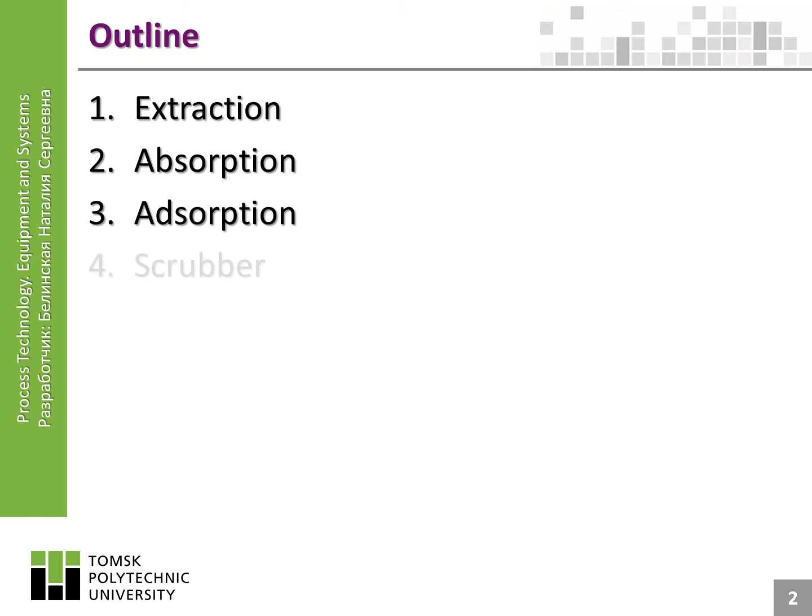In this lecture you will learn about extraction, absorption, adsorption, scrubbers, and solvent dewaxing.

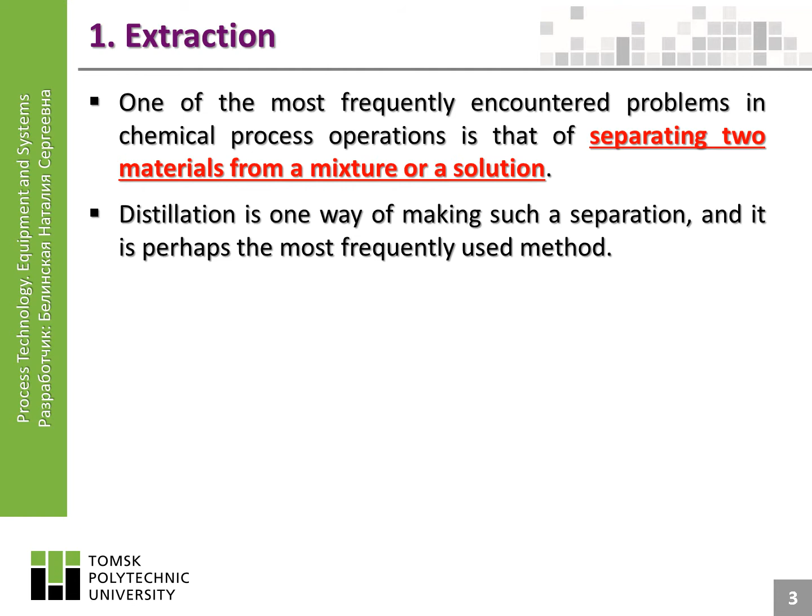Extraction: one of the most frequently encountered problems in chemical process operations is separating two materials from a mixture or a solution. Distillation is one way of making such a separation, and perhaps the most frequently used method. Another useful method is extraction. Extraction is a process for separating two materials in a mixture by introducing a third material that will dissolve one of the first two materials but not the other.

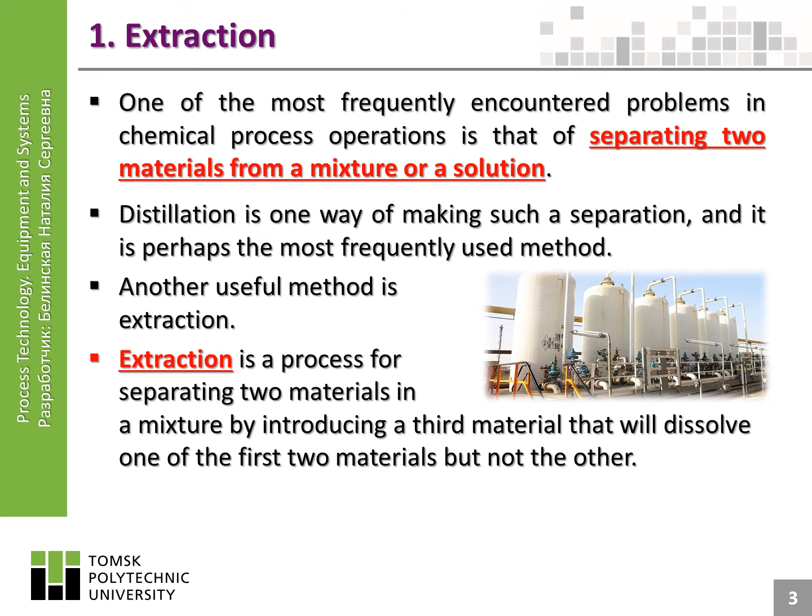Each method of separation has its own advantages and disadvantages, and several situations call for the use of liquid-liquid extraction rather than distillation or other methods.

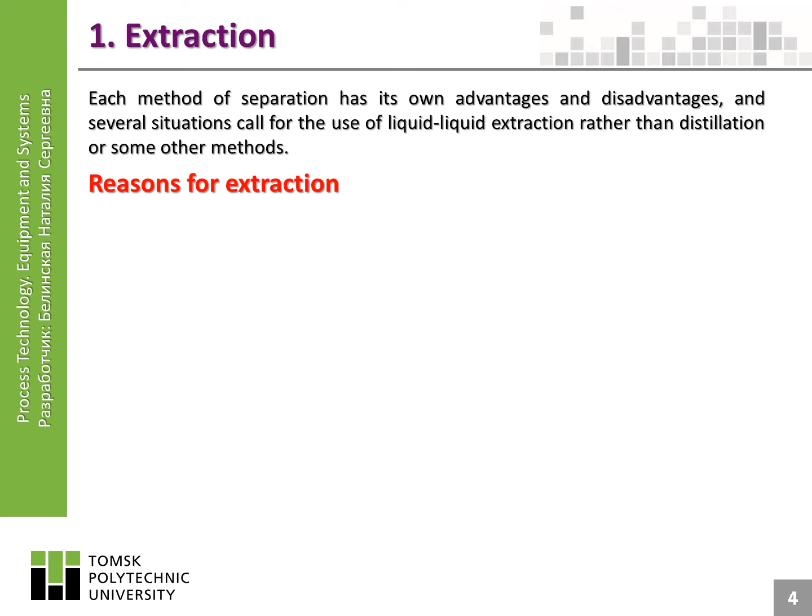Reasons for extraction: in many cases, it is impractical to separate two chemicals by distillation because the boiling points of the materials are too close together. In such a case, it is frequently possible to find a third chemical that will dissolve one of the two chemicals. In this situation, extraction would be a better method than distillation.

Many chemicals are highly sensitive to heat and will degrade or decompose if raised to a temperature high enough for distillation. In this case, extraction, which can usually be carried out at normal temperatures, would be a practical alternative.

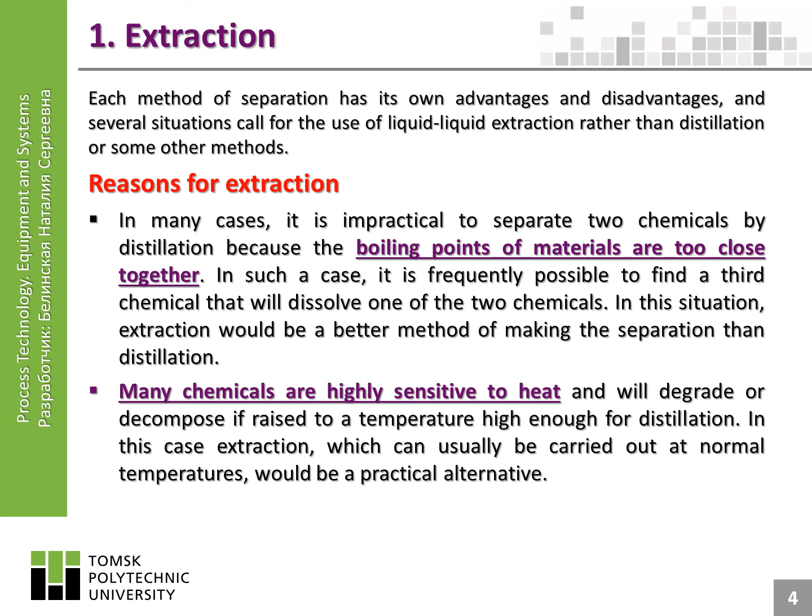Often, one of the materials to be separated is present in very small amounts. It might be possible to recover such a material by distillation, but it is usually much easier and more economical to do so by extraction.

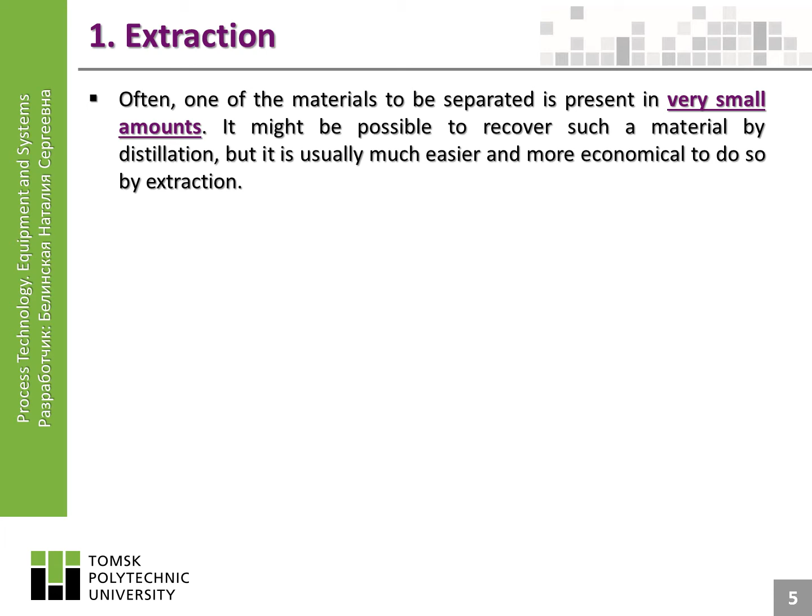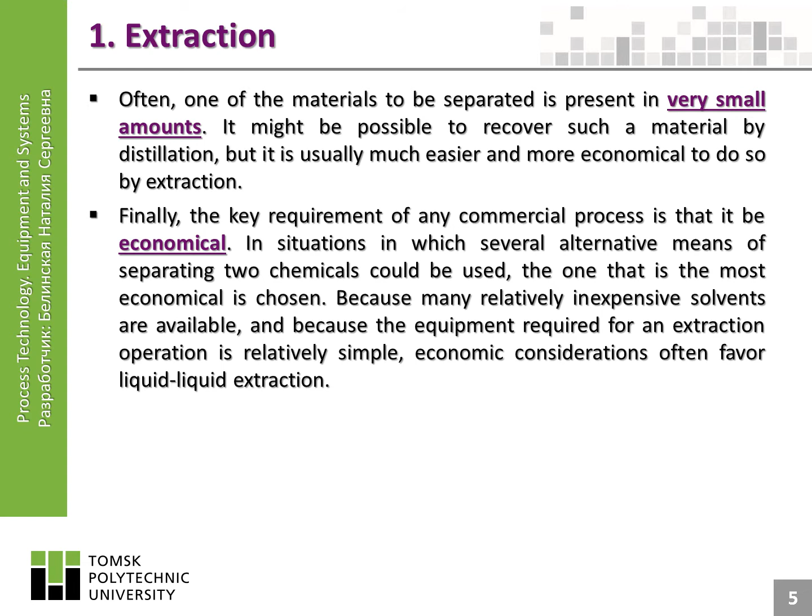Finally, the key requirement of any commercial process is that it be economical. In situations where several alternative means of separating two chemicals could be used, the most economical one is chosen. Because many relatively inexpensive solvents are available, and because the equipment required for an extraction operation is relatively simple, economic considerations often favor liquid-liquid extraction.

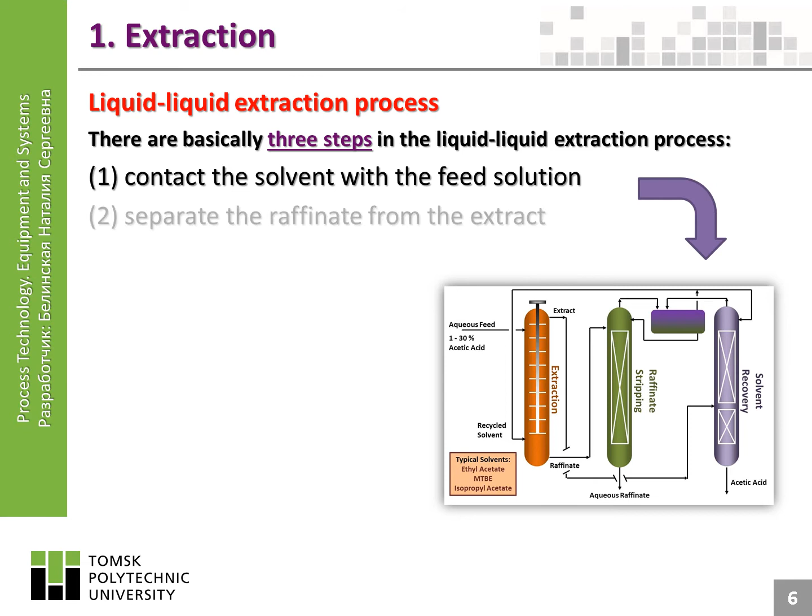Liquid-liquid extraction process: there are basically three steps. First, contact the solvent with the feed solution. Second, separate the raffinate from the extract. Third, separate the solvent and the solute. This final step, recovery of the solvent and solute, is left to be done by other processes such as distillation.

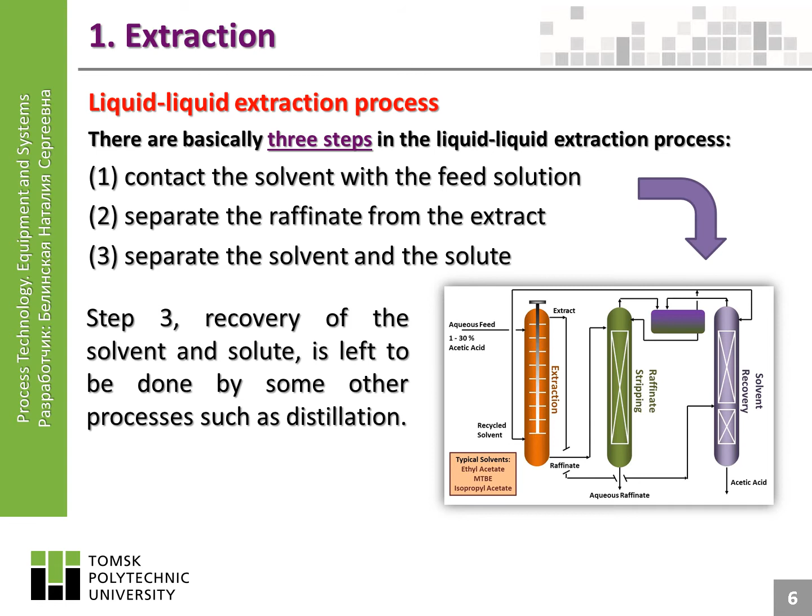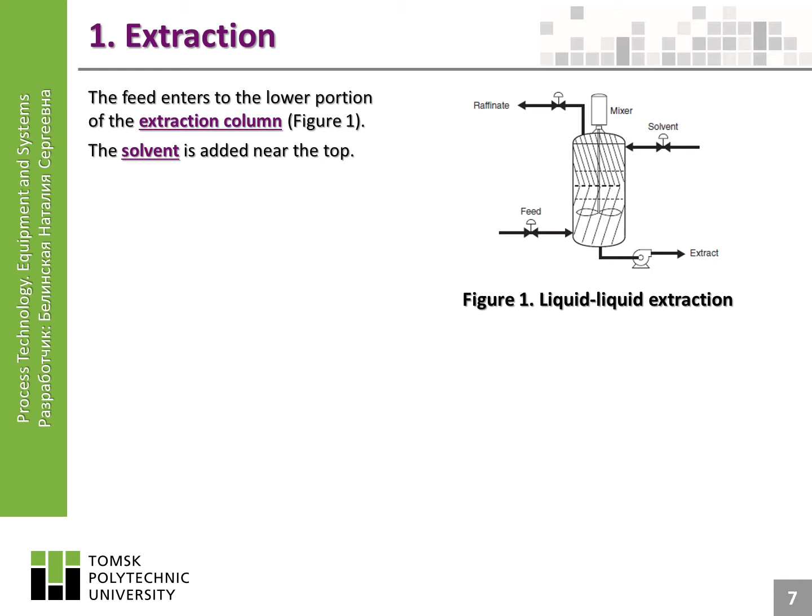The feed enters the lower portion of the extraction column, and the solvent is added near the top. Because of density differences, the lighter feed solution tends to rise while the heavier solvent sinks to the bottom. As the two streams mix, the solvent dissolves the solute. Thus, the solute, which was originally rising with the feed solution, reverses its direction of flow and goes out with the solvent through the bottom of the column.

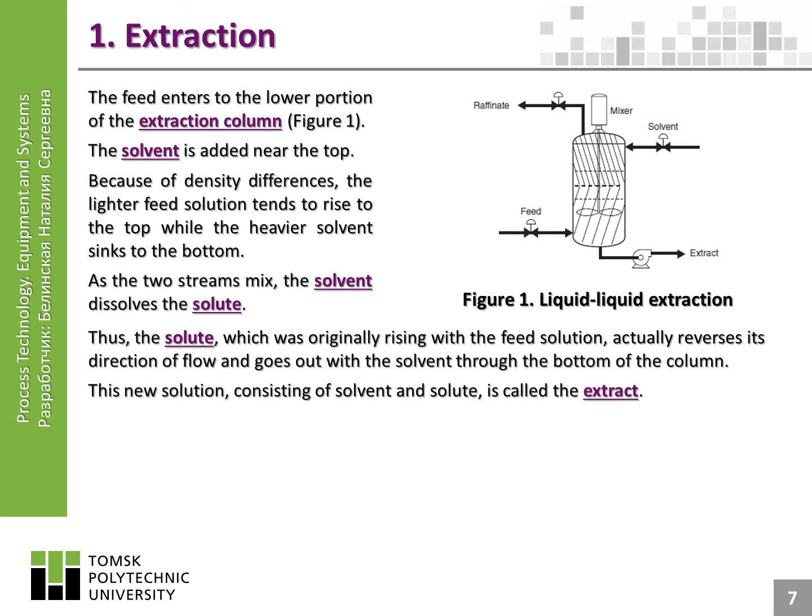This new solution, consisting of solvent and solute, is called the extract. The other chemical in the feed stream, now free of solute, goes out the top as the raffinate. The raffinate and extract streams are not soluble in each other and will layer out.

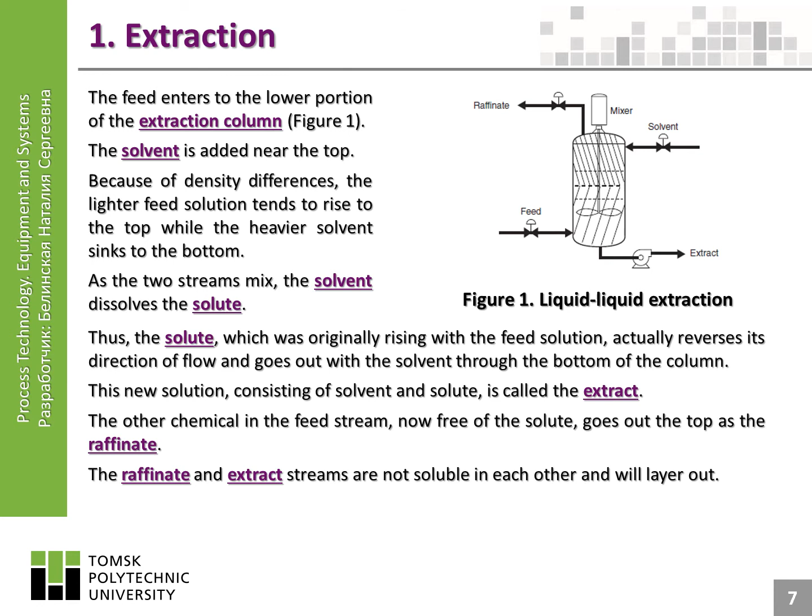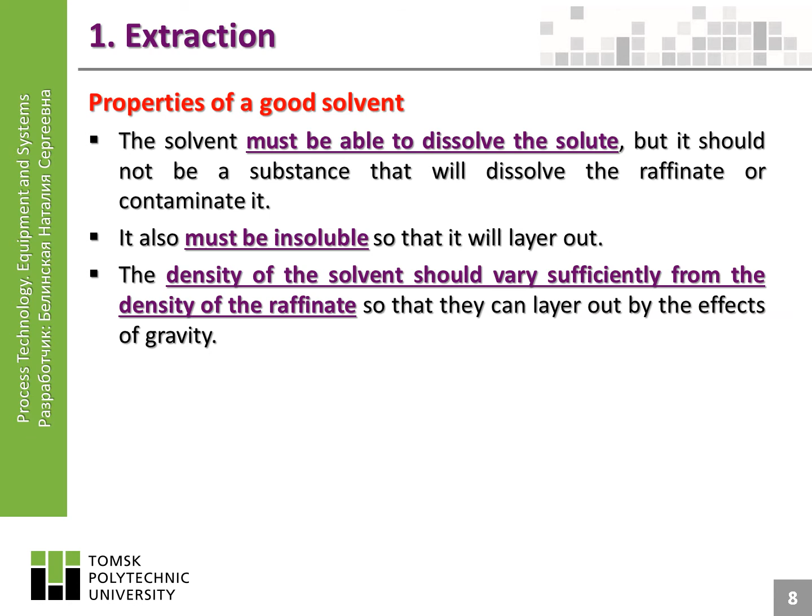Properties of a good solvent: the solvent must be able to dissolve the solute, but it should not dissolve the raffinate or contaminate it. It also must be insoluble so that it will layer out. The density of the solvent should vary sufficiently from the density of the raffinate so that they can layer out by the effects of gravity.

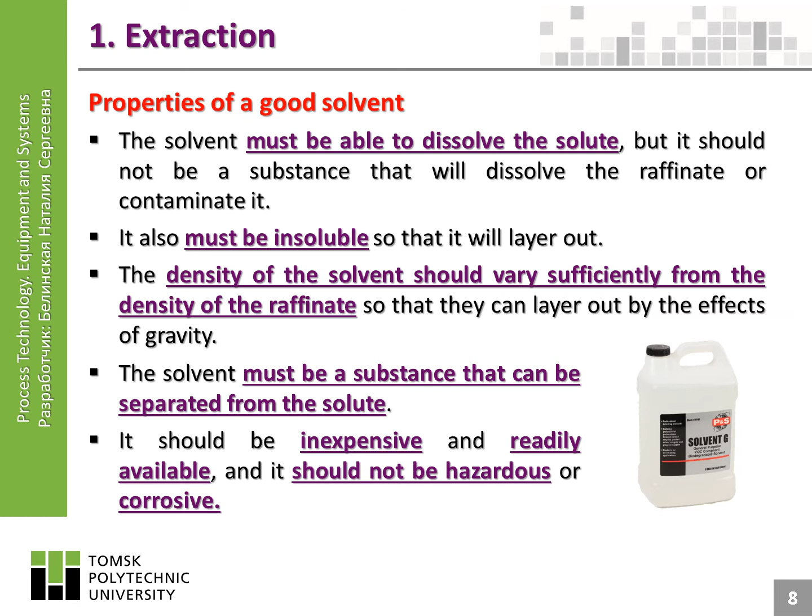The solvent must be a substance that can be separated from the solute. It should be inexpensive and readily available, and it should not be hazardous or corrosive.

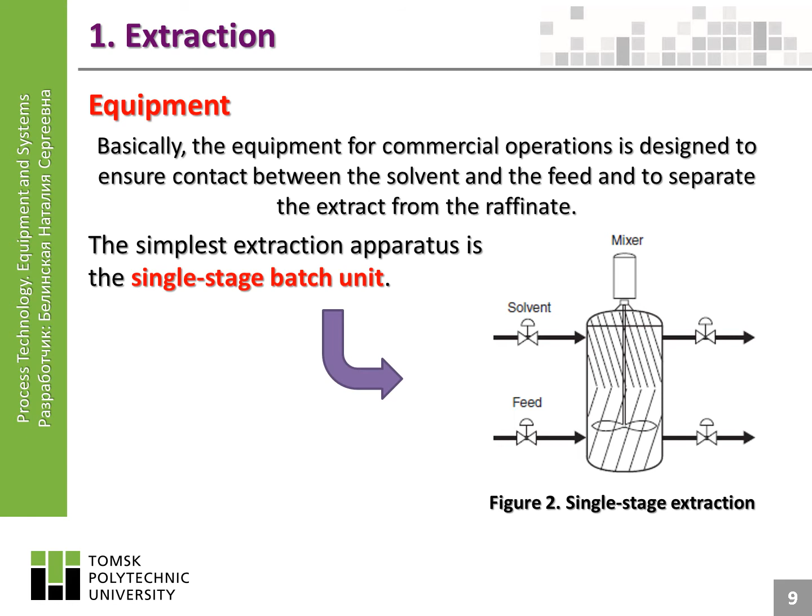Equipment: basically, the equipment for commercial operations is designed to ensure contact between the solvent and the feed and to separate the extract from the raffinate. The simplest extraction apparatus is the single-stage batch unit. Multi-stage operation consists of a series of single-stage units coupled close together. Figure 3 illustrates concurrent extraction, and Figure 4 illustrates countercurrent extraction.

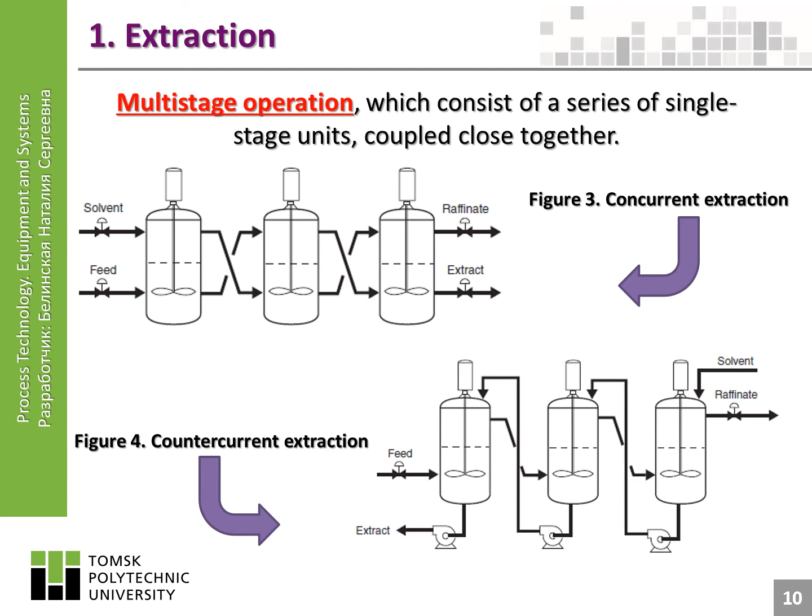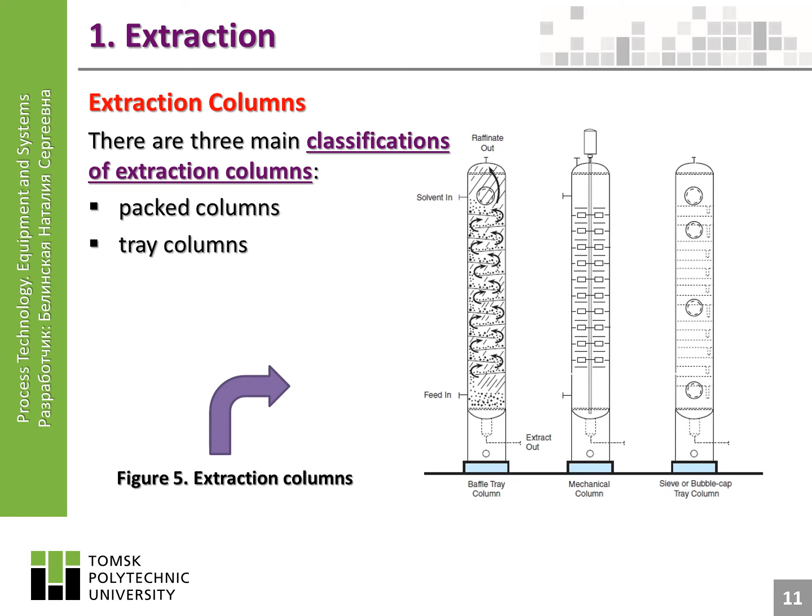Extraction columns: there are three main classifications of extraction columns: packed columns, tray columns, and mechanical columns.

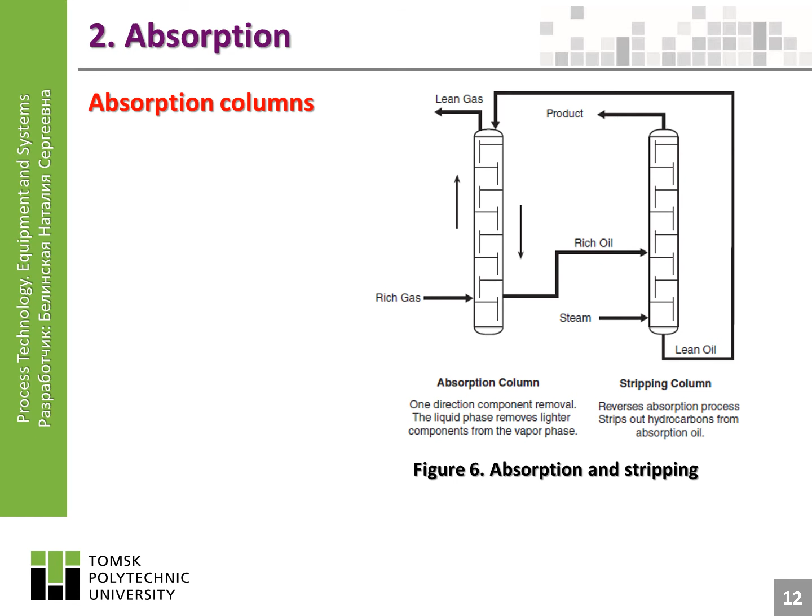Absorption. Absorption columns: an absorption column is a device used to remove selected components from a gas stream by contacting it with a gas or liquid. Figure 6 illustrates the scientific principles involved in absorption.

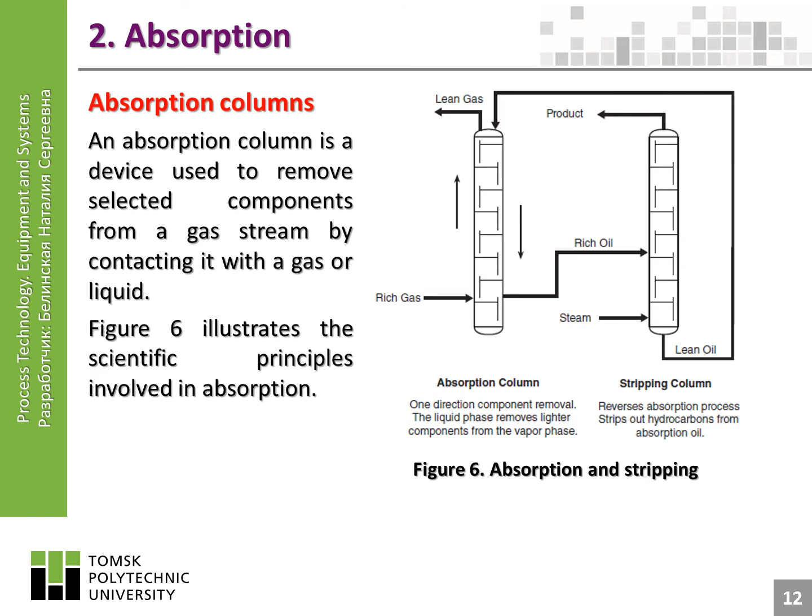Adsorption is the process in which an impurity is removed from a process stream by making it adhere to the surfaces of a solid. During the adsorption process, the mixture to be separated is passed over the fixed bed medium, the adsorbent, in the primary device.

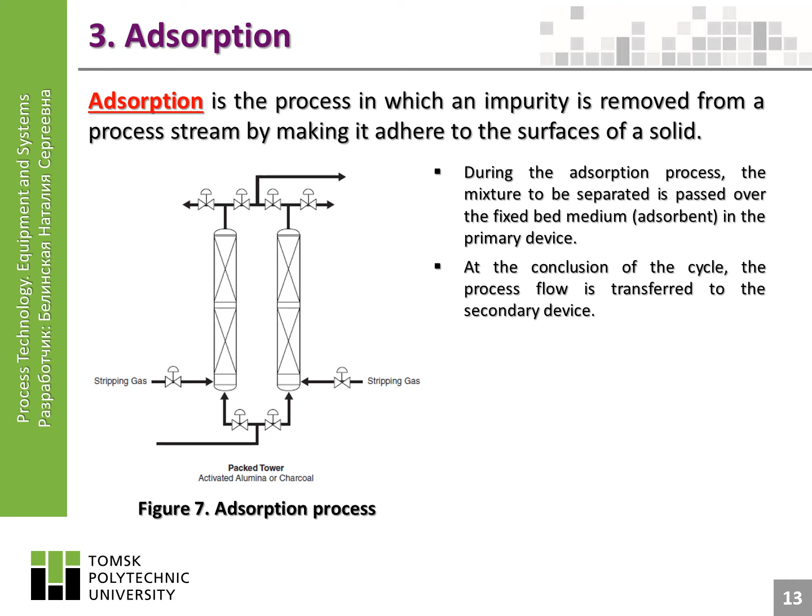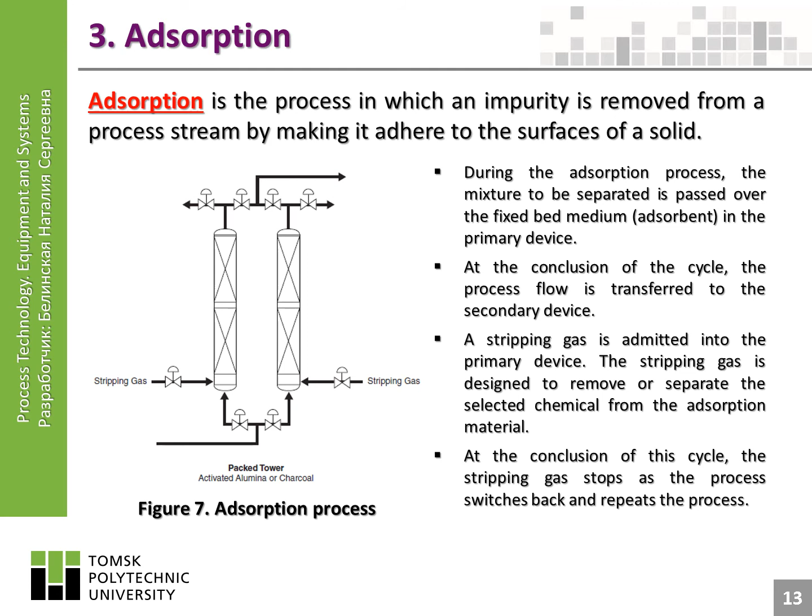At the conclusion of the cycle, the process flow is transferred to the secondary device. A stripping gas is admitted into the primary device, designed to remove or separate the selected chemical from the adsorption material. At the conclusion of this cycle, the stripping gas stops as the process switches back and repeats.

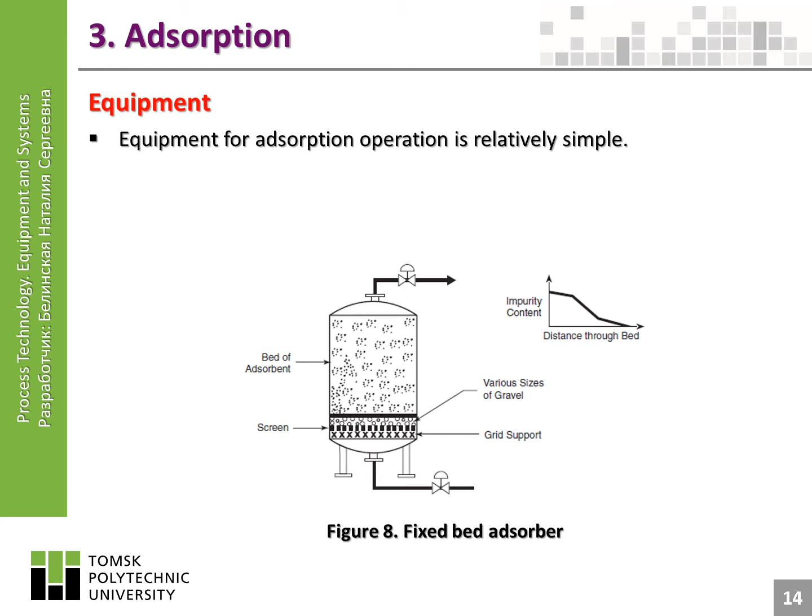Equipment for adsorption operation is relatively simple. It consists primarily of a tank or vessel containing a bed of adsorbent, be it ion exchange resins, molecular sieve, or whatever. In most cases the bed is fixed.

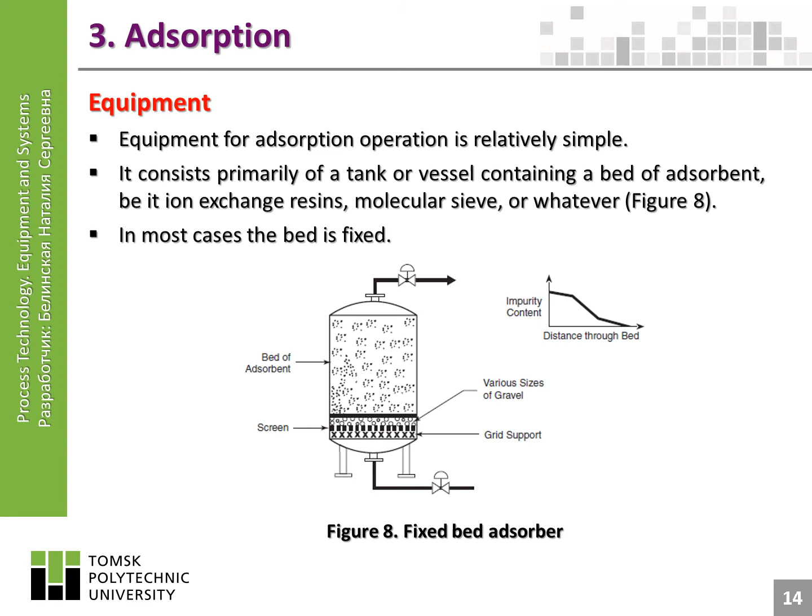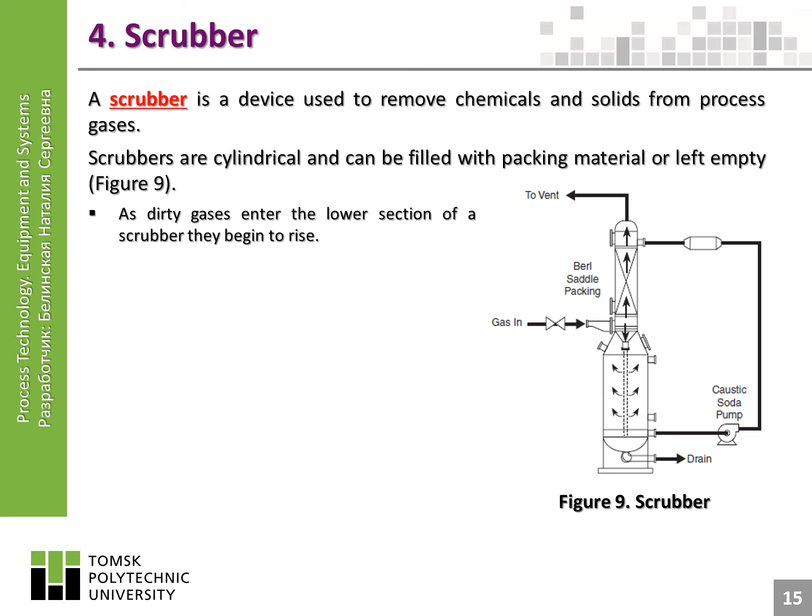Scrubber: a scrubber is a device used to remove chemicals and solids from process gases. Scrubbers are cylindrical and can be filled with packing material or left empty. As dirty gases enter the lower section of a scrubber, they begin to rise and encounter a liquid chemical wash being sprayed downward. As the vapors and liquid come into contact, the undesirable products entrained in the stream are removed.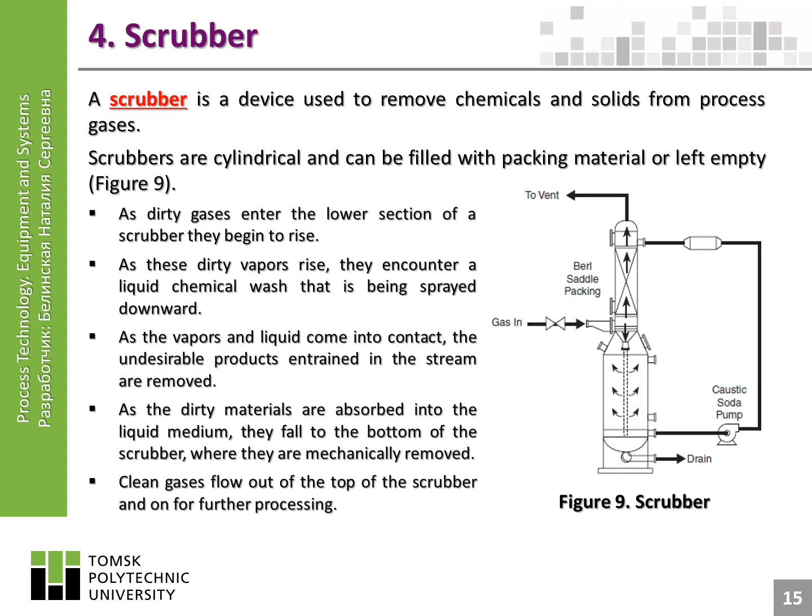As the dirty materials are absorbed into the liquid medium, they fall to the bottom of the scrubber, where they are mechanically removed. Clean gases flow out of the top of the scrubber and on for further processing.

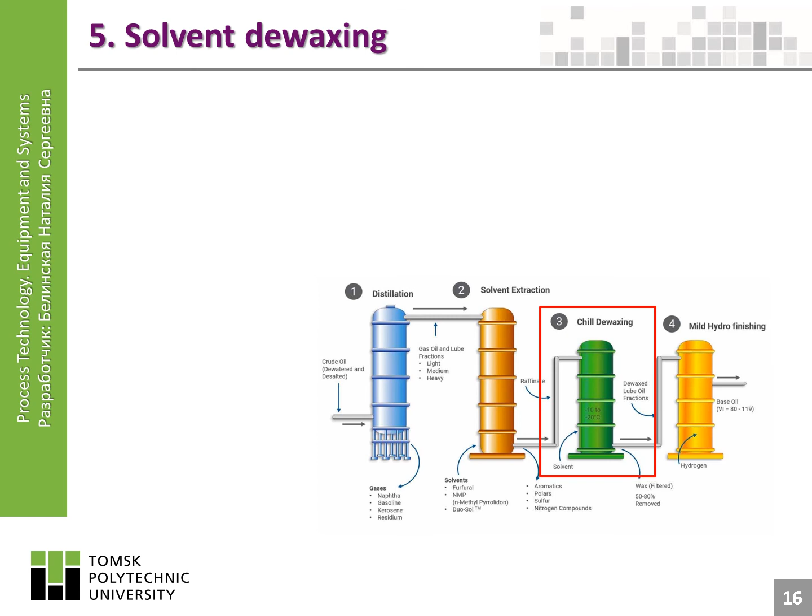Solvent dewaxing. Dewaxing is the removal of wax from lubricating oils. The wax content is critical in determining the viscosity of the lubricating oil. In cold weather, it is necessary for lubricating oil to retain its ability to flow and lubricate. Lubricating oils are classified into different grades on the basis of wax content.

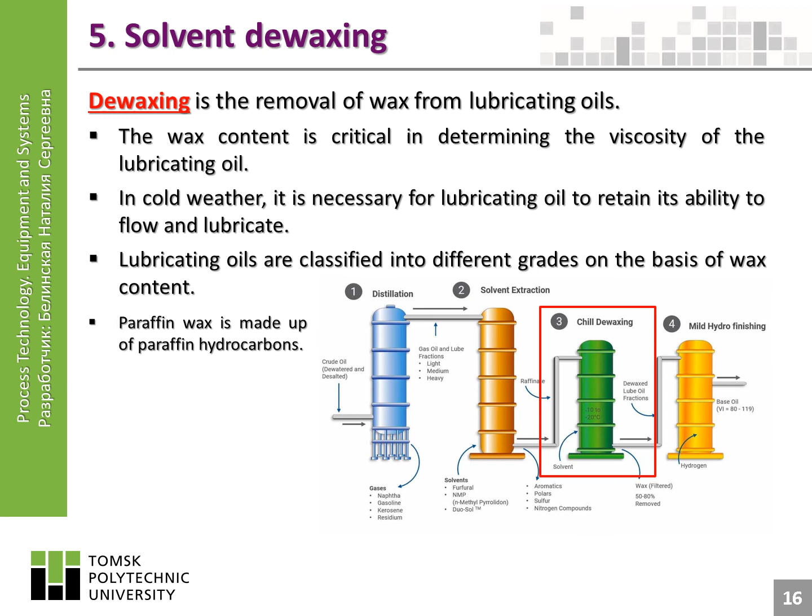Paraffin wax is made up of paraffin hydrocarbons. These hydrocarbons will crystallize when the oil is cooled. The wax then forms and can be separated by the filter in the crystallizer.

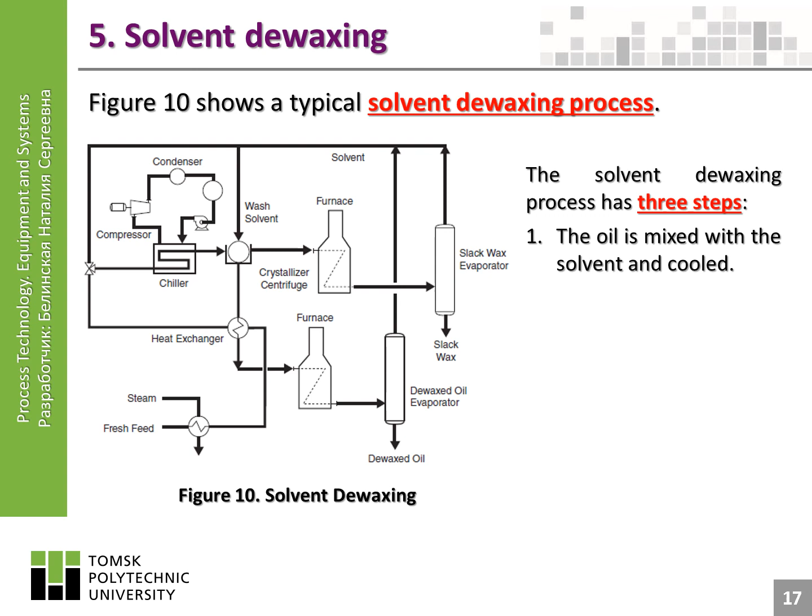Figure 10 shows a typical solvent dewaxing process. The solvent dewaxing process has three steps: the oil is mixed with the solvent and cooled; the oil is filtered and the wax removed; and the solvents are recovered and recycled.

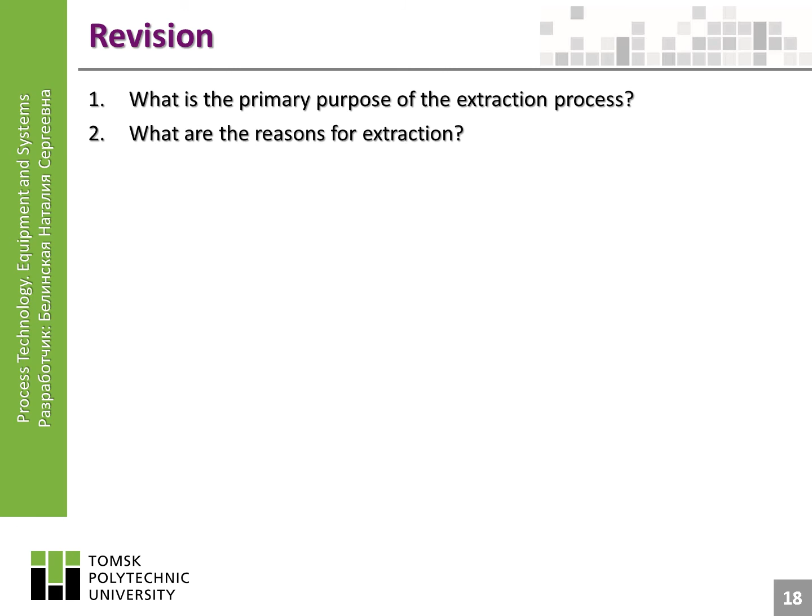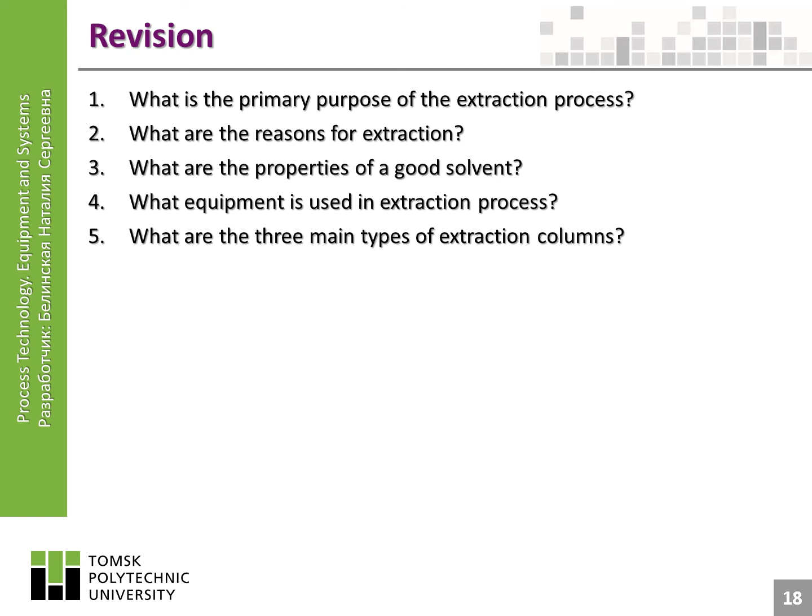To revise the learned material, answer the questions: What is the primary purpose of the extraction process? What are the reasons for extraction? What are the properties of a good solvent? What equipment is used in the extraction process? What are the three main types of extraction columns? What is the difference between adsorption and absorption? What is the primary purpose of a scrubber? What is the primary purpose of solvent dewaxing?